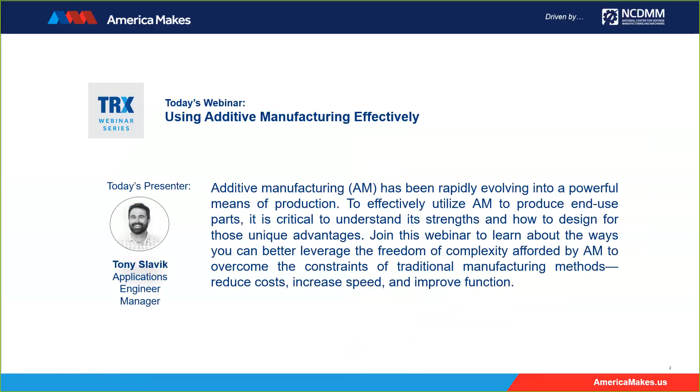Like Scott mentioned, my name is Tony Slavik. I am the Applications Engineering Manager here at Fathom. I spent a lot of time running our manufacturing operations, and most of my experience with additive is born of running those operations. Today I'm going to be talking about how additive is changing the landscape of manufacturing.

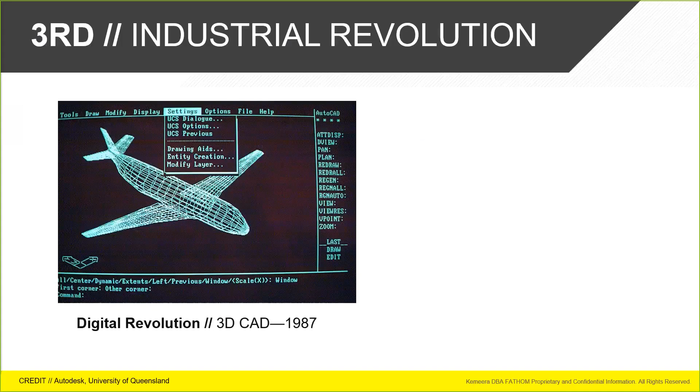With that, we like to frame it with a little bit of history and the current landscape of manufacturing industries. Immediately following the creation of personal computers in the 70s, people tried to create designs digitally, and this heralded the beginning of what's been called the Third Industrial Revolution. By the 80s, the PC was capable of the computations required for 3D CAD.

Today, the workflow for designing and creating products is radically different than it was before this shift. Complex geometry can be created very rapidly, and then immediately the part can be manufactured anywhere in the world with very little human interaction. 3D CAD broke major barriers in communication. The accessibility of these tools put the power to create into the hands of many. However, while manufacturing technology became more advanced and efficient, accessibility of manufacturing has remained a major hurdle for product makers.

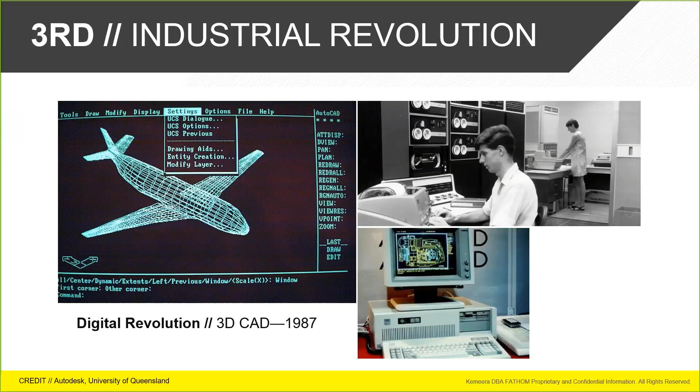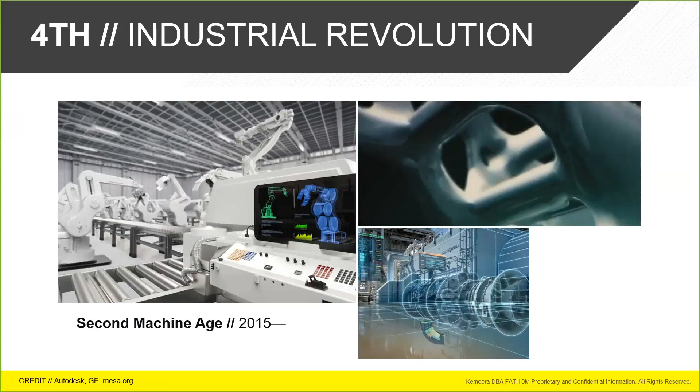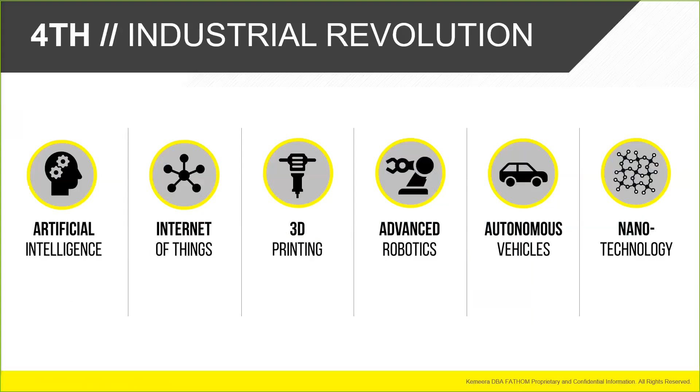Now we're seeing a new industrial revolution, dubbed the Fourth Industrial Revolution, or Second Machine Age, or Industry 4.0. There's a few names for this, but this new paradigm comes on the heels of and is intrinsically tied to that previous industrial revolution. It's defined by a range of new technologies that are fusing the physical, digital, and biological worlds, and really impacts all disciplines, economies, and industries. Each of these alone has tremendous potential to affect massive change, but the evolution of these disruptive technologies is moving at an exponential rate and is boosted further by their interconnectivity.

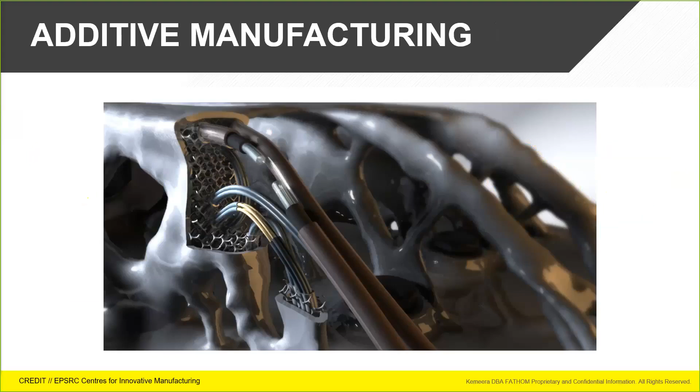The digital world is not only being connected, but it's being created in the physical world through 3D printing. Limitations of what can be done are being removed layer by layer as additive technologies improve in their accuracy, resolution, materials, and speed. Additive manufacturing is providing tools to manufacture things that were previously impossible. Also, it is enabling faster and shorter learning cycles as designs are proven and validated more quickly, and customization and on-demand manufacturing are more and more viable.

Additive manufacturing is being influenced and influencing the other major disruptive technologies of the Fourth Industrial Revolution. Robotics are enabling 3D printing technologies by expanding the capabilities of existing technologies like FDM. Companies like Branch Technology and AI Build are using robots to print objects on the architectural scale. Taking advantage of the degrees of freedom of these robots, they're able to print multi-axis geometries that are otherwise not possible with existing machines. They're producing 3D toolpaths to create single extrusion lattice structures that are very lightweight and scale larger than any other machine. They are also combining computer vision and machine learning to processes which enable the machine to see what is actually printing and fix errors on the fly.

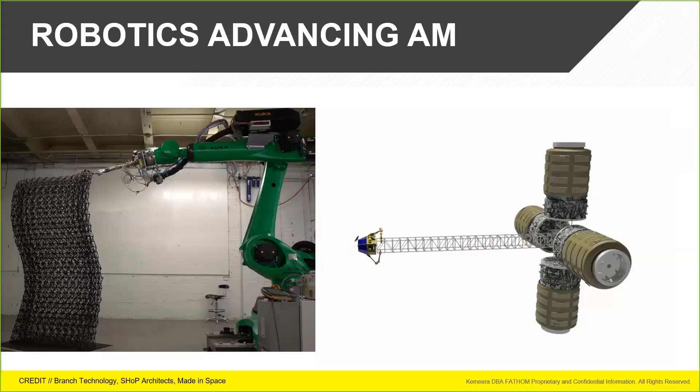Made in Space is building advanced robotics coupled with additive manufacturing to build structures in space. Project Archinaut sends material and a small printer and spacecraft into space to build things like large imaging arrays, space stations, and communication structures. I should say, intending to build imaging arrays, space stations, and structures.

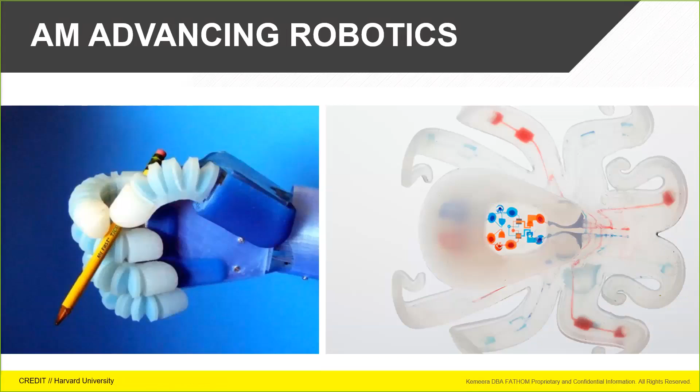3D printing is also enabling the robotics industry to produce mechanical components and assemblies that would otherwise be impossible. One of the more interesting fields of research is soft robotics. This concept uses pneumatics or hydraulics combined with flexible materials to enable movement. The image on the right is a 3D printed autonomous soft robot called Octobot, produced by researchers at Harvard. It is produced using a combination of 3D printing, molding, and soft lithography. The brain is a 3D printed microfluidic logic controller which distributes the flow of gas to each tentacle. Then the fuel source is a small amount of hydrogen peroxide, which reacts to produce a large amount of gas within the body to power the tentacles.

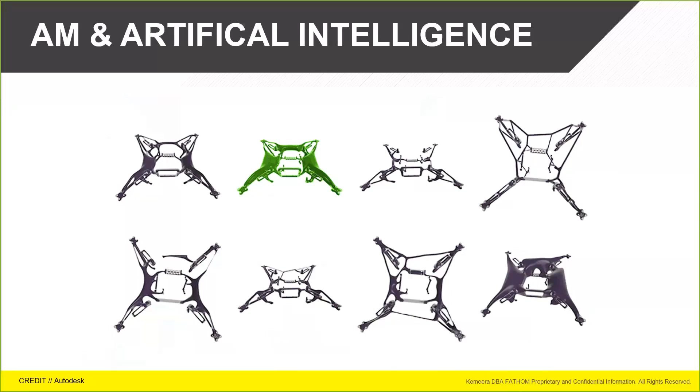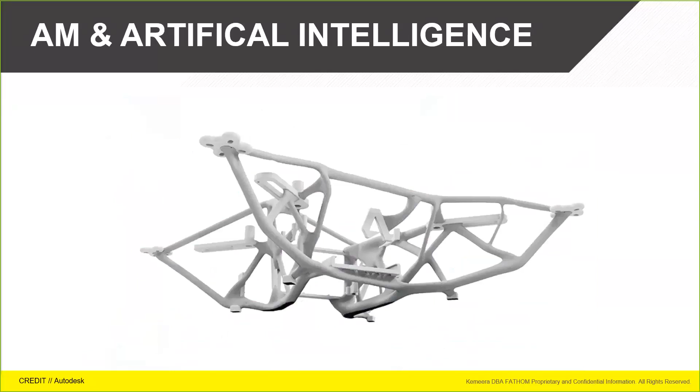Artificial intelligence is directly driving 3D printing through generative design. A genetic algorithm can produce multitudes of results that fit the criteria of the constraints and objectives given to it. If machine learning is applied to these algorithms, the computer can take feedback from a human on which solution is better than the others. By collecting and learning from this data, the algorithm can incorporate that feedback into its next iteration of designs and eventually become better at predicting the optimal solution.

3D printing is enabling big accomplishments in nanotechnology, from microstructures with unique mechanical properties to microscopic medical implants. These are created with high precision technologies to deposit materials at the micron scale.

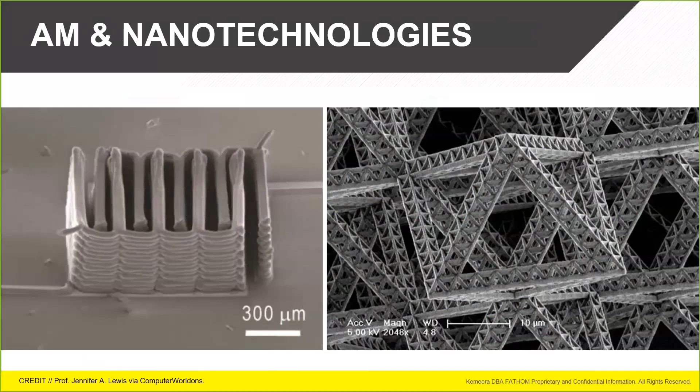The image on the left is a microscopic battery the width of a human hair. It's created using an FDM-like process to deposit conductive materials, creating an anode and a cathode. The image on the right is a fractal truss structure with features as small as 5 microns.

In the biomedical field, 3D printing has offered major improvements, especially in medical implants. Implants can now be made patient-specific thanks to CT scans and new generative software. Bone implants can be designed with microporous surfaces, specifically designed for bone tissue to attach and grow within.

The same kind of geometry is being used with special additive techniques, using natural polymers to create artificial scaffolding for patient's tissue to grow onto.

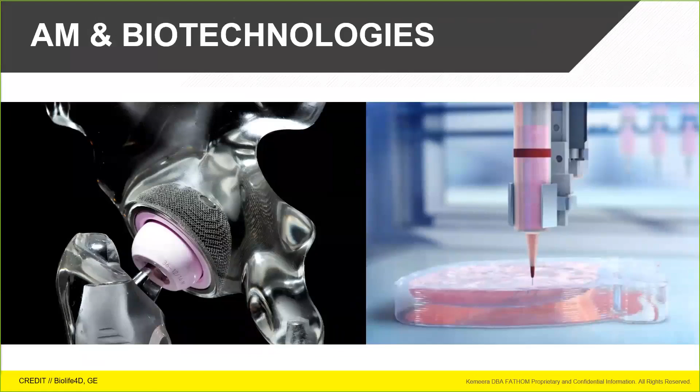The image on the left is a 3D printed replacement hip, which is now relatively old - the first one, I believe, was 10 years ago. On the right is potentially the next step in additive. BioLife 4D recently successfully printed a human cardiac patch with the goal of printing an entire human heart.

Graduate students from the University of Washington developed a way to create objects that communicate wirelessly directly off the 3D printer. They did this by using conductive plastics and creating springs, gears, and switches that can be used to translate motion into antenna-transmitted information.

For example, they created an anemometer which measures wind speed and attached it to a gear. When the gear spins, the teeth connect with an antenna embedded into the object, and that antenna then reflects ambient Wi-Fi signals, which can be decoded by a Wi-Fi receiver. The faster the wind, the faster the gear spins, and the more rapidly those signals are transmitted.

They also created a scale and a flow meter that can measure water speed. Material development was critical in this example and is part of very exciting developments in the industry. As they create more designs and take on more complex devices, they're making their designs available to the public.

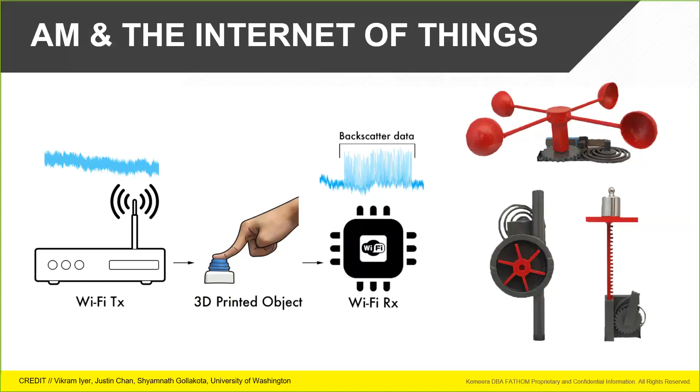3D printing has been affected by advancements in material development, but there have also been major advancements in structuring materials in ways that were previously impossible. The Self-Assembly Lab at MIT has been developing techniques for combining multiple materials that react to environmental factors such as liquids, heat, and even biological elements like sweat to create responsive materials that can change shapes and assemble into new forms. By combining materials with different mechanical properties and specific geometries, they can control how they deform to create a specific shape.

Another group at MIT, run by Neri Oxman, called Mediated Matter, is doing research on combining multiple materials with different functional properties. With technologies like PolyJet, they are able to place multiple materials, pixel by pixel, or more accurately, voxel by voxel, to produce functional gradients in material properties. By placing focus on how material is deposited, this group is unlocking potential in current material sets and moving them further than originally thought possible.

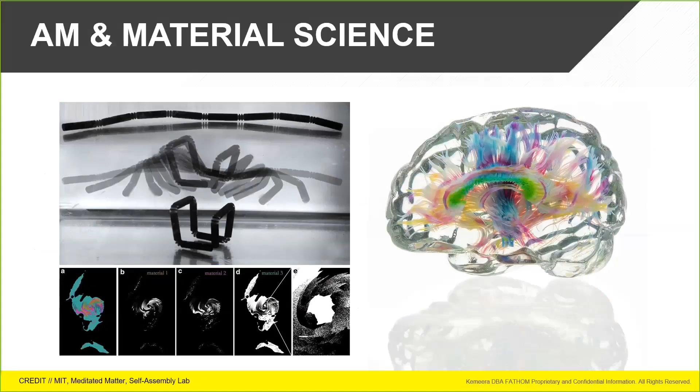The image you see on the right shows white matter tractography, visualizing bundles of axons which connect different regions of the brain.

So really, how does this all come together and these tools begin to shape the future of manufacturing?

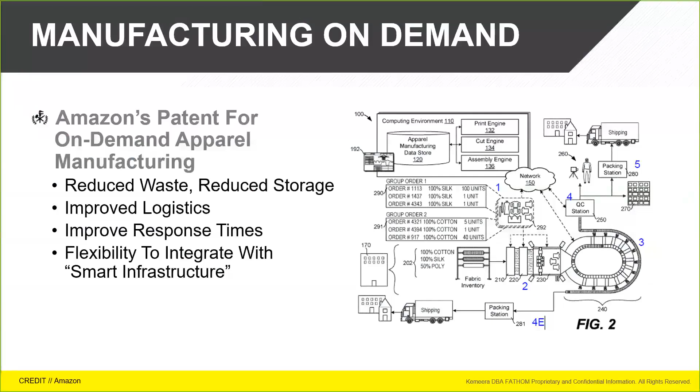Amazon is an early adopter of a new breed of smart manufacturing. Amazon has been working toward manufacturing apparel on demand. The computerized system would include textile printers, cutters, and an assembly line, as well as cameras designed to snap images of garments that would provide feedback on alterations needed in subsequent items.

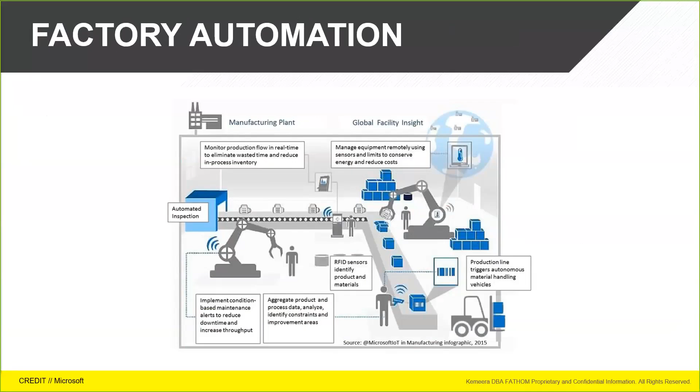The creation of uninterrupted 3D printing hardware and software platforms is enabling on-demand hard goods manufacturing. With manufacturing on demand comes improvements in factory automation. Tied to improvements in robotics, machine learning, artificial intelligence, and interconnectivity, automation is becoming more and more attainable on smaller scales and at lower costs.

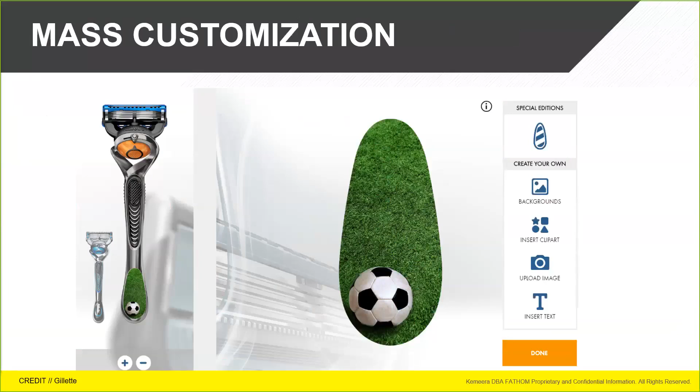All of this is leading to the ability to provide large-scale mass customization. Mass customization has already been demanded by consumers for aesthetic purposes, but through additive manufacturing, more advanced customization can be achieved, adding shape, color, and even function. The ability to customize geometries on large scales is only just starting to see its potential.

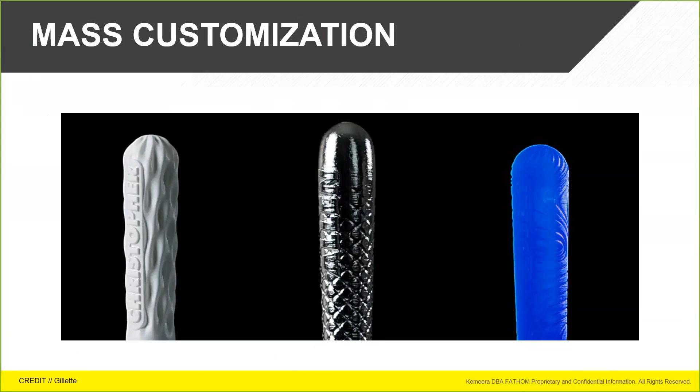Gillette has been piloting a concept called Razor Maker, which uses Formlabs' SLA printers on an online portal that allows consumers to shop for an ever-increasing library of handle designs that are then produced on a 3D printer and shipped to the consumer. Far from being just an aesthetic improvement or a way to have ownership of a unique product, additive manufacturing also affords amazing potential in improving people's lives.

Limbforge is helping patients around the world gain access to customized and configured prosthetics that are printed locally. They help reduce material and equipment operation costs and simplify the supply chain dramatically, helping the patient obtain an affordable solution to what was, until recently, extremely expensive and usually difficult to fit correctly.

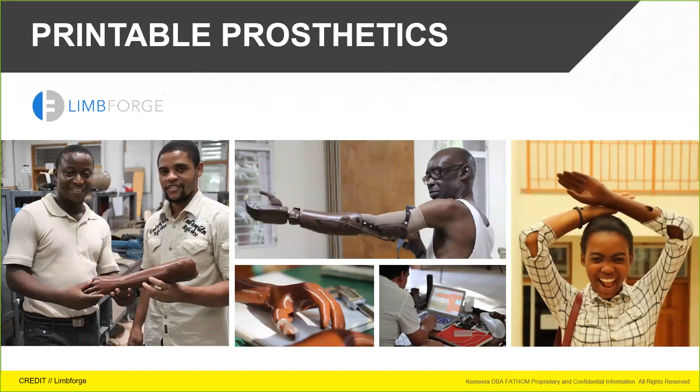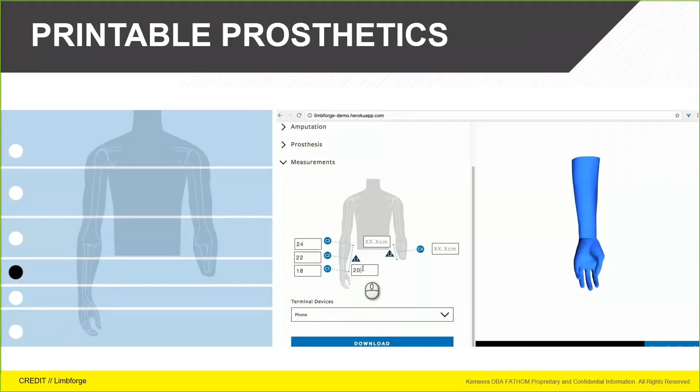Combining the manufacturing ability of 3D printers with improvements in software and design tools, Limbforge has created a system that will allow for a much simpler and customizable manufacture of prosthetics. This simplification not only reduces costs, but it also comes with improved function and higher levels of comfort from highly tuned custom fits. The old process was onerous at best.

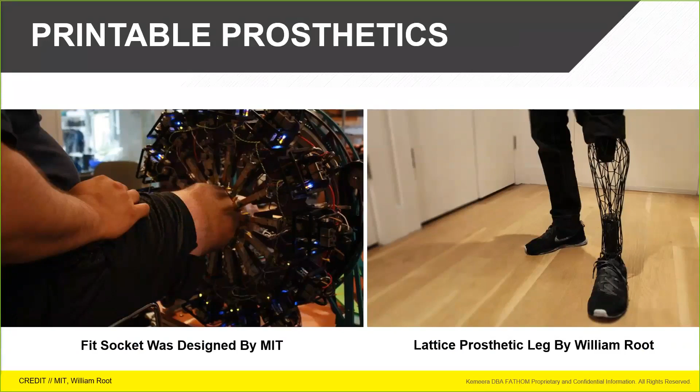You would create a mold, you would cast, you would do a vacuum form, you would fit it, you would assemble it, you would adjust it, and then you would repeat the process. With new measurement tools, the new process can be as simple as scan, then print.

With the digital scan and additive manufacturing, prosthetics can be designed and optimized to fit specific purposes for specific people at a lower cost than previously imagined.

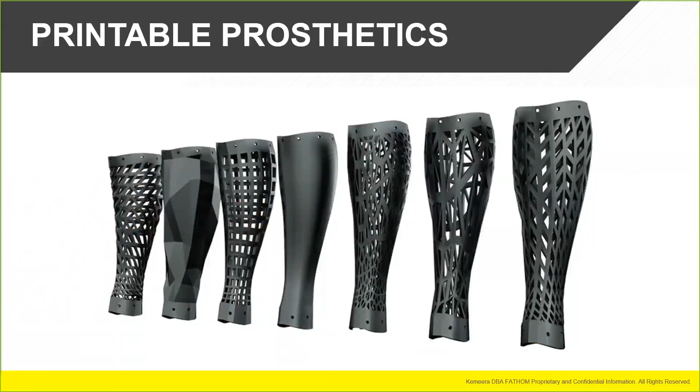These are all adding up to a new paradigm within manufacturing. Current manufacturing is struggling to meet these changing demands. Their current production networks are rigid, capitally constrained, and geographically misaligned. Tepid adoption of additive for end-use parts is further hampering manufacturers' ability to respond to these changes in demand. Only about 3 in 10 manufacturers in a recent study by Accenture have implemented key digital manufacturing-related technologies.

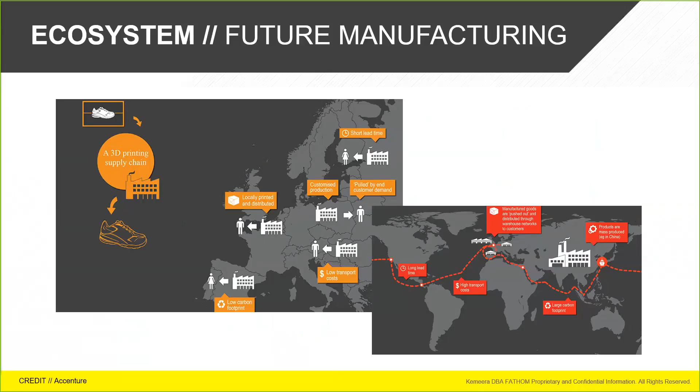In order to take advantage of these disruptive technologies and stay ahead of the curve on these developing trends in manufacturing, it's helpful to understand how and when additive can be effectively used.

One of the strongest areas of growth in additive is in manufacturing tools. This is a broad subject with a wide range of applications and is ideal for additive given the typical low volumes needed for manufacturing tools.

Cycle required a test fixture for physical testing of plugs and receptacles for an electronics assembly. The fixture lasted without breaking for a production run of 10,000, with testing 100% of the parts off the line. 3D printing allowed the fixture to be designed with intuitive function and labeled for ease of use on the production floor.

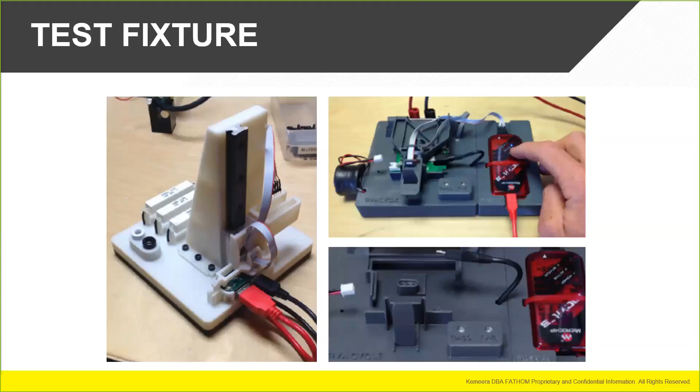To machine the first fixture assembly, they went through 3 iterations. The estimated price from a local machine shop was roughly $1,600 with a 2 to 3 week lead time. To print the part using an FDM printer, the material cost was $80 and little labor and no programming required. Print time was 28 hours, which allowed them to go through 3 iterations in 1 week, less time than it would have taken to get to the first iteration from their vendor.

Solaxis Ingenious Manufacturing is based in Canada and is a tiered supplier in the transportation, aerospace, defense, and industrial sectors. Using FDM Ultem 9085 resin and nylon 12, they were able to iterate quickly and created a high-volume door seal assembly jig that decreased cycle times by 4 seconds.

Not only were they able to improve their cycle time, but they were able to 3D print the jig that is over 100 pounds lighter than the traditional jig for this application. And they reduced the design and fabrication time by at least 2/3 as compared to traditional methods. This shrank the overall time from 16 to 20 weeks down to just 3 to 5 weeks.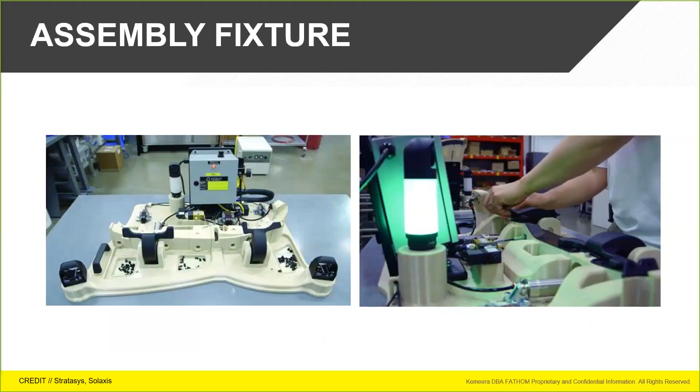Using additive for this assembly jig enabled Solaxis to continuously improve the jig, saving customers production time and money. In turn, they have increased their reliability of the door seals they provide to the OEMs. This has reduced their compliance issue down to 0, which resulted in higher profits.

Another example of using additive for fixtures is an inspection. Oreck, a vacuum manufacturer, has regular new product cycles which require tooling for 20 to 30 components that need to be inspected by a CMM and assembled in a production line.

The previous process was relatively linear. They would tool up, they would receive first articles, create fixtures, program their CMM, build the assembly pallet, and then release to production. The time it took from receiving first articles to releasing the assembly pallet to production was typically about 30 days. Their new process employs additive by creating all of the components and fixtures while the tooling is being done.

This allows them to build the assembly pallet and program the CMM before first articles are received. As a result, their 30-day first article inspection process was reduced from 30 days to just 1 day.

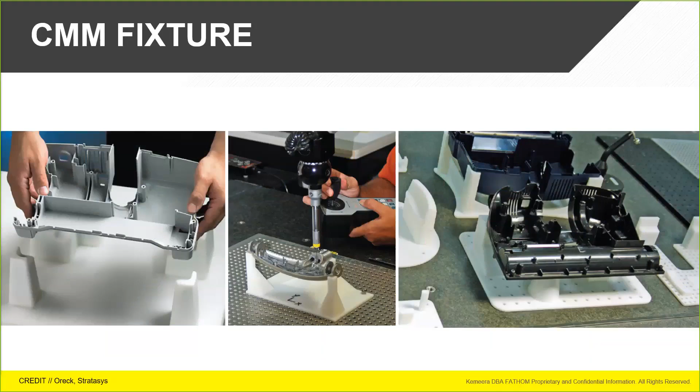Another area of additive that is growing very quickly is end-of-arm tooling. This will only become more apparent as robotics become more pervasive in our manufacturing processes.

End-of-arm tooling is also a good example of additive effectively replacing traditional methods to create not only cost savings, but performance enhancements. Depending on what point in a supply chain a robot is being used, the end effector can vary quite a lot. From logistics to production, the end-of-arm tool can be used for welding to gripping. Potential benefits can be more than just a faster, cheaper solution. Design freedom and different materials can show improvements in the end product.

You can use lattice or topology optimization to make lighter, stronger parts. Weight reduction can allow for larger payloads and improve cycle time between robot PMs. Integrated components such as vacuum channels, water lines, simplify the assembly and protect things during operation. Plastic reduces scratching when gripping and even dampens impact when tool crashes happen, mitigating some of the risk to your robots.

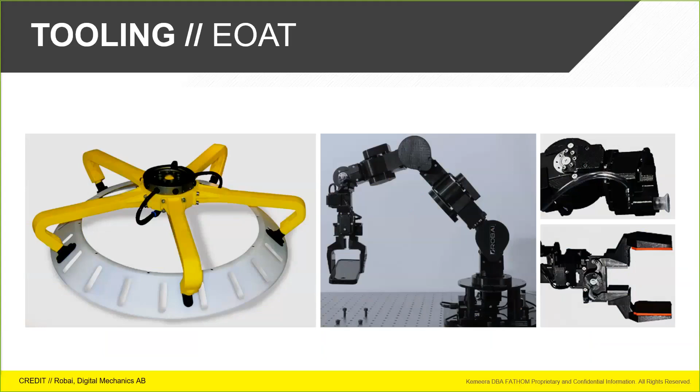HP worked with an automotive supplier to create an end-of-arm tool to pick up and assemble glass. 4 pneumatic suction cups are directly connected to the printed part's fluid channels to minimize assembly and to protect the vacuum lines from damage during operation. The part was then lightweighted to enhance precision, increase load weight, and increase arm speed.

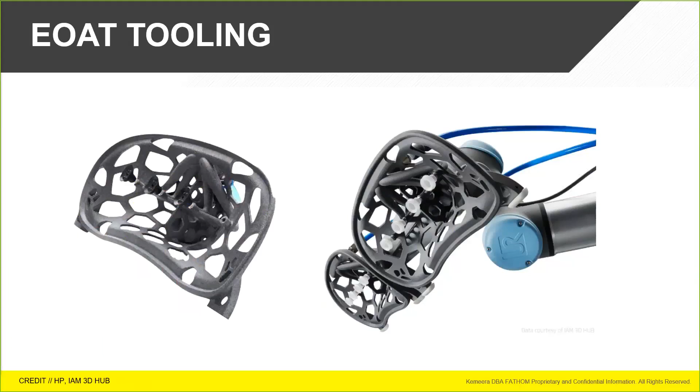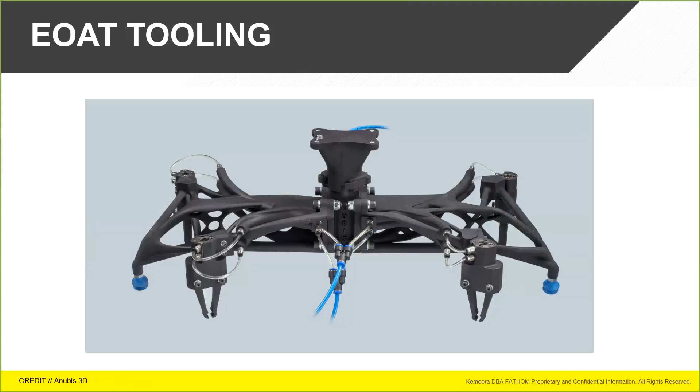Aside from tooling, one of the biggest areas of hype around 3D printing when it began to really gain mainstream recognition was end-use parts. The idea being that everyone would own a 3D printer and would replace or repair any manner of items in their day-to-day lives. The practice of 3D printed parts used in place of CNC or injection molding with no design change, but just a lateral move in the manufacturing method, is considered direct part replacement.

Used in many cases for bridge to production in low volume, high complexity tooling, this can be a very effective tool, but in many cases it leaves some of the potential of additive untapped. We got through the hype of replacing all injection molded and mechanical plastic parts with additive, and we have, as an industry, defined more clearly where it does make sense to apply direct part replacement.

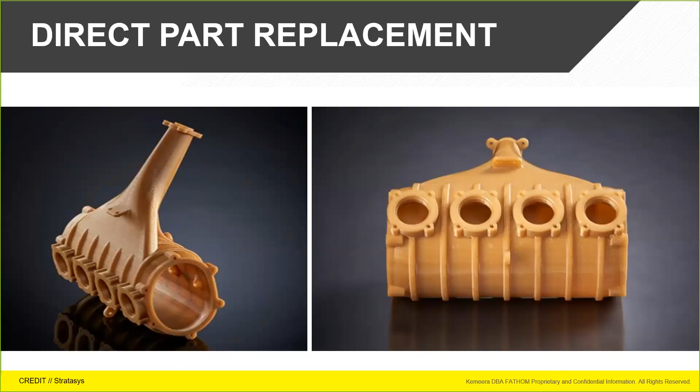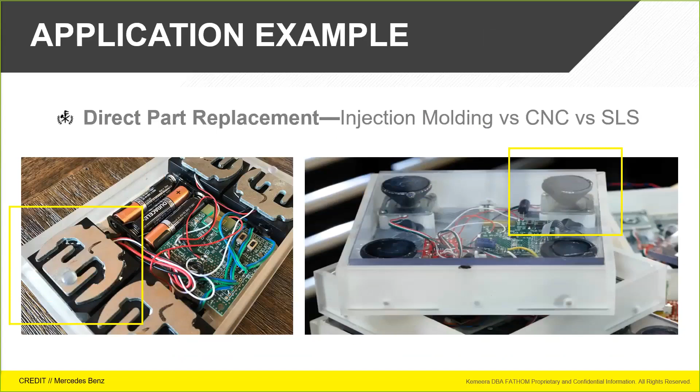However, due to a very short lead time and limited time for design validation, we explored the option of 3D printing versus injection molding. We found that the cost of either method was close enough to make either option cost effective, but the added benefit of having only 1 to 2 day lead time for the additively produced parts versus the 2 weeks needed to get an injection mold made was the deciding factor to go with additive.

We built the first 400 SLS parts overnight, and to further reinforce that decision, when we assembled the first set, the designers discovered an interference that required a design change, a change that would have ended up being catastrophic had we not just saved 2 weeks by not going to injection molding.

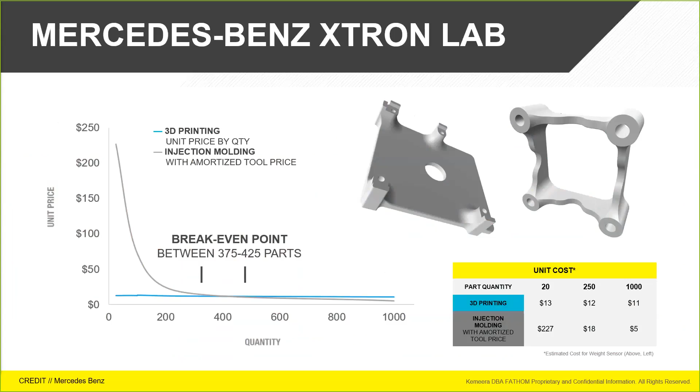But as I alluded to earlier, the real potential in additive manufacturing comes with new possibilities in design that are opened by the additive processes. With that, new design tools are being created and old tools are being revitalized and improved to keep up with the expanding potential afforded by additive manufacturing.

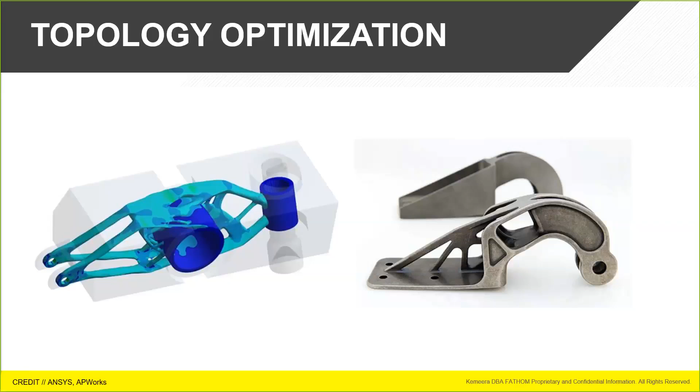A tool that has been around for a while but has gained a resurgence in 3D printing is topology optimization. Topology optimization uses physics, stress simulation to generate optimal geometry. A major advantage is that parts are lightweighted specifically for the loading condition they will be under. Lighter parts means less material, and lighter parts also means more efficient assemblies.

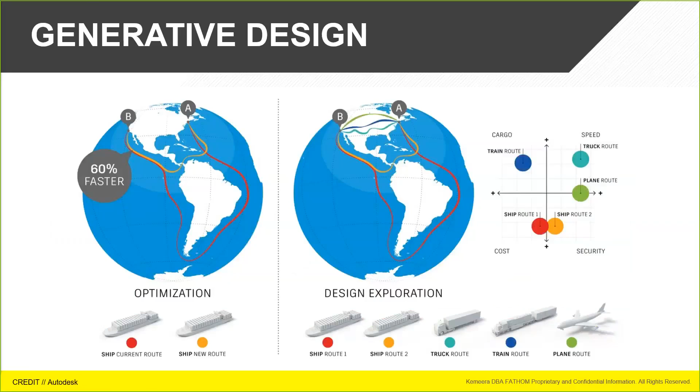With topology optimization, typically you get one solution based on your problem setup. With generative design, you can change the question and broaden the problem to get more answers or solutions. This is a definition put forth by Autodesk, and it's worth noting here that the definition of generative design is typically up for debate.

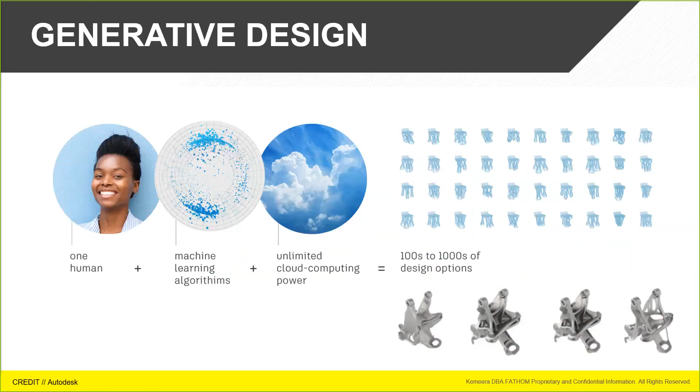With generative design, you, the designer, are able to leverage algorithms and cloud computing to get hundreds of design options. This allows the designer to make the final decision on what to compromise on in your end design. With Autodesk's newly released tool, the algorithms not only take away unneeded elements like in topology optimization, but it will also add elements to make new solution sets possible.

Another very interesting design practice, lattice design, is a technique that has been enabled by additive manufacturing. A given design space is voxelized and populated with a lattice unit cell. The structure is then optimized based on the loading constraints applied to the part. Lattice structures have a range of applications, including and not limited to lightweighting, energy absorption, heat transfer, filtration, and medical implants.

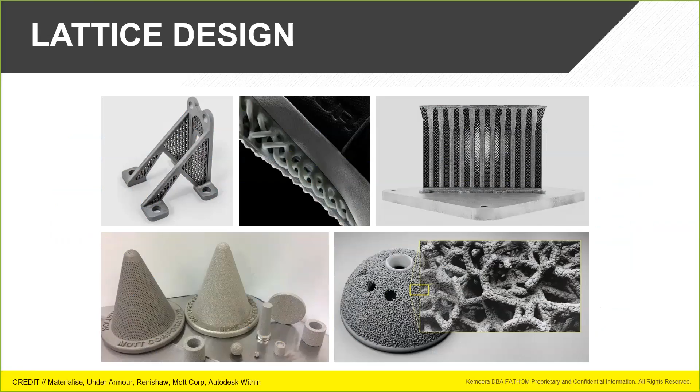When these new design tools are applied to the design freedom of additive, the results of using additive become more dramatic. In some cases, function and cost is dramatically improved, and in other cases, previously unsolvable problems are now solvable.

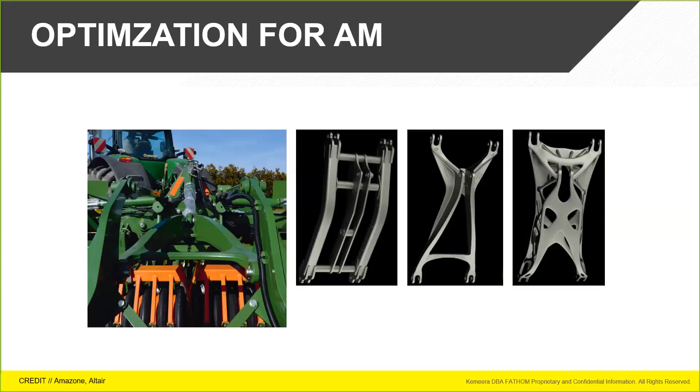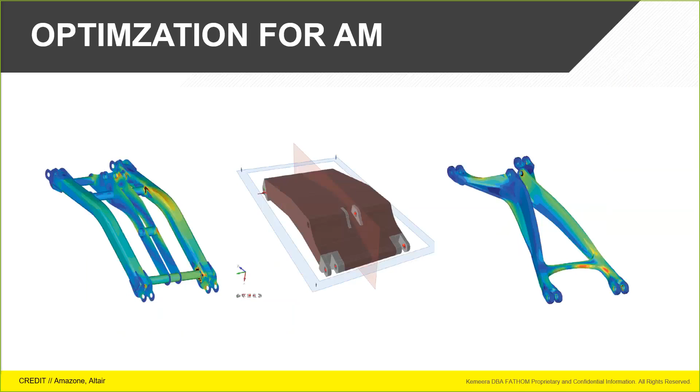Amazone, a manufacturer of industrial farm equipment, looked at redesigning a suspension component prone to damage and replacement. The existing design was limited by manufacturing constraints when originally designed. In conjunction with Altair, a software provider with a topology optimization tool called Inspire, they were able to redesign the component to be more durable. The end result was an increase in durability by a factor of 2.5. They also reduced their weight by 8% and had lower production costs and high flexibility for customer add-on and customization.

Andreas Bastian, a researcher at Autodesk, took on a project to redesign an aircraft seat frame. He took the original design and used Autodesk's Netfabb to design and optimize a lattice structure that would withstand the same loads as the original aluminum casting. The design ultimately reduced the weight by 54%, which is a fuel savings in the millions and lower carbon emissions. The only problem is the cost of 3D printing in a qualified material at this scale.

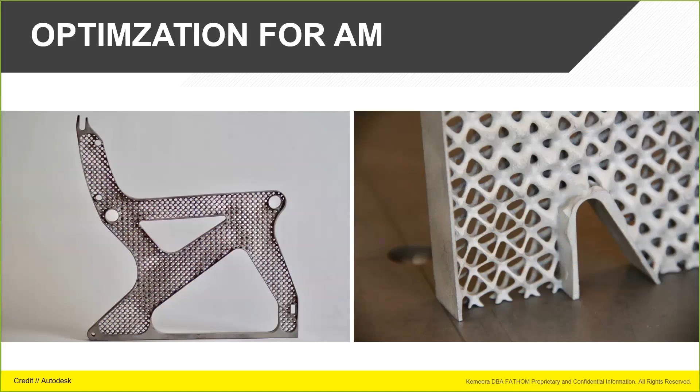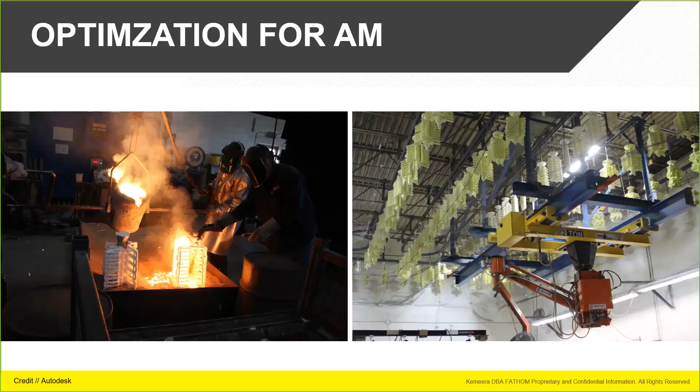The solution Andreas came up with was to 3D print the part as a master pattern and cast it in metal. FAA guidelines are very strict on materials and processes, so qualifying a 3D printed part for an airplane can be close to impossible. Casting is already a qualified process with qualified materials. Andreas decided to cast the seat in magnesium rather than aluminum, which is 35% lighter. This process could produce approximately 160 seats every 2 days.

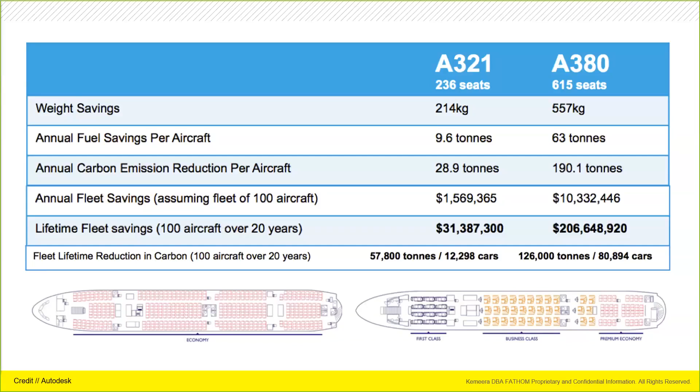The design optimization he employed accounted for 30% of the weight reduction, and the switch of material to magnesium accounted for 24%. Taking an Airbus A380 with 615 seats, if they replaced the seat on a fleet of 100 planes with a lifespan of 20 years, the cost savings would be $206 million. It would also reduce the carbon emissions by 126,000 tons, which is the equivalent of 80,000 cars being taken off the road.

The software developer and additive manufacturer Materialise has created a workflow for surgeons to customize 3D printed drill guides for their patients. Then their customized software solution designs a porous structure that mimics bone porosity and is specifically designed to improve secondary fixation of implants through bone on-growth and ingrowth. Of the cases studied with an average follow-up of 2 years, the implant survival rate has exceeded 98%.

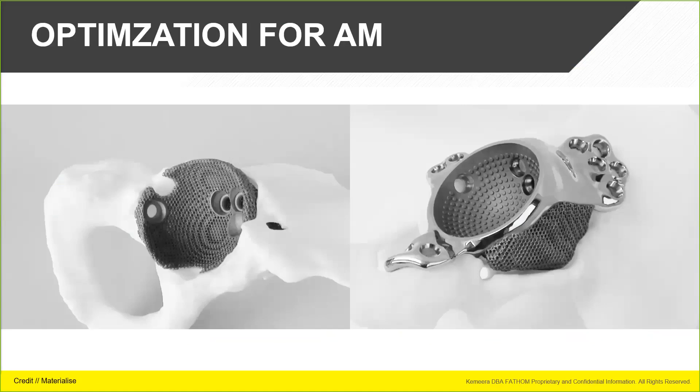Leading from that, the current gold standard for implementing additive is utilizing part replacement and optimization to improve designs to the point of consolidating assemblies. This can be achieved in simple assemblies. Normal manufacturing constraints have permeated our design thinking, but as those constraints are removed, we find that many assemblies are easily combined.

For example, we redesigned this fan blade housing to work for additive, so it will be combined into a single part and quoted the part price at various volumes. We also took the original design and quoted that for injection molding, which required 3 tools and 5 parts in the assembly. For this particular part, the prices converged around 2,150 parts. But we are seeing this convergence push out further and further as technologies become faster, cheaper, and more efficient.

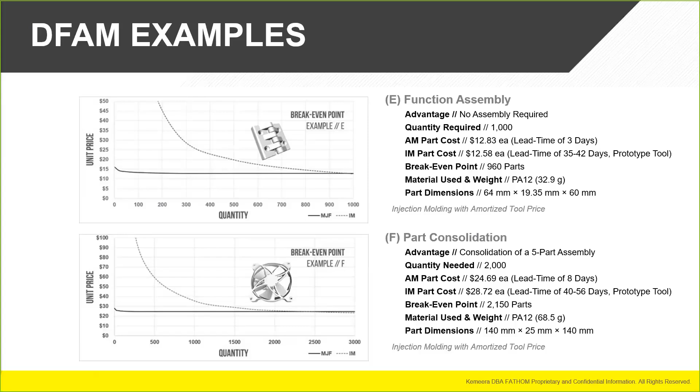Optisys is an antenna design company specializing in additive to create highly integrated RF antennas. This particular design was originally 100 discrete parts. Optisys redesigned it for metal additive manufacturing. The end result reduced the part count of 100 parts to 1 single part. It also cut weight by 95%, reduced the lead time from 11 months to 2 months, reduced production costs by 20%, and eliminated 75% of non-recurring costs.

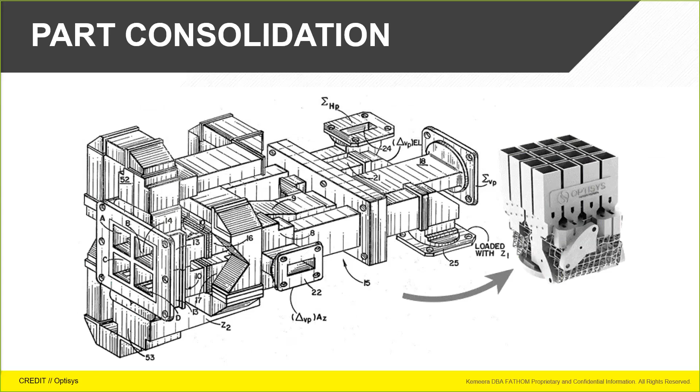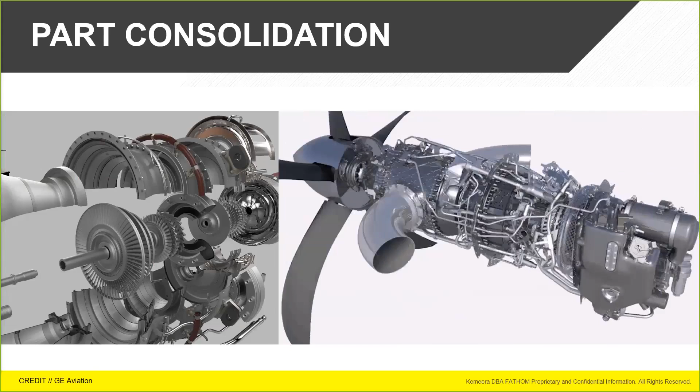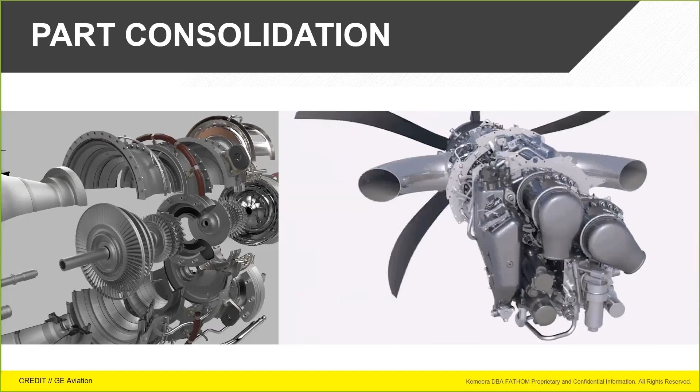GE Aviation is working on its next generation advanced turboprops. They took the existing assembly and, leveraging the design flexibility of 3D printing, combined parts and improved performance. The resulting design had 35% of the engine to be manufactured additively, with the original 855-part assembly reduced down to just 12 components. The design also reduced the weight, improved fuel burn by 20%, and resulted in 10% more power. Also, on the manufacturing side, it saved on assembly time, inspection time, certification time. Reliability increased and human error was reduced.

Industries such as aerospace and medical are leading the adoption of additive as a manufacturing method. Due in part to having many high-value, low-volume products, it has been a perfect fit and has shown high returns on investments in the new manufacturing methods. As adoption has increased, prices and technologies have improved, and manufacturers have become more efficient. This trend has been growing in nearly every industry and will continue to grow into the foreseeable future.